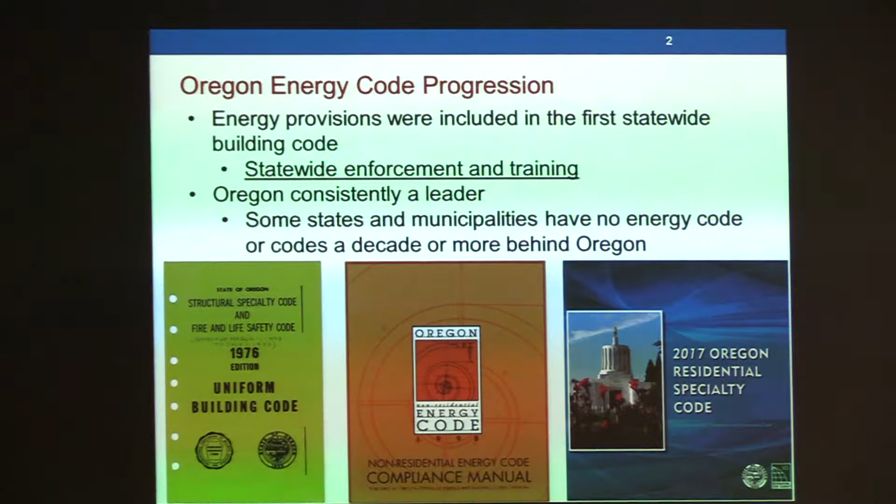One thing you can see here is I couldn't find a copy of the 1973 code, but I did find the '76. The '73 version, or at least a working cover that looked good, did have energy provisions. The very first code had statewide provisions for single-family residences. So from '76 to, for some of us old-timers remembering the energy compliance manuals we had through the 80s and 90s, all the way up through the current 2017 Oregon Residential Specialty Code, and soon probably a new structural code and energy code coming out.

One of the things about our code system is this board here, which is represented by 5 other boards that are here to provide input, background, and public comment. Just a reminder of how the system is working and how well it has worked, given the expertise not only from this group but from the public process we have here in Oregon.

One thing before we get into the real heart of it—there are a couple of background and disclaimer slides we wanted to get into here first, as we're moving into a code adoption process.

One thing was that we wanted to really look at the board's principles for code adoption, things that we try and keep in mind.

First is really keeping that long view—looking ahead, it's not just about a snapshot in time today. It's looking at how codes progress, where we can move things, because we've developed really good code in this state—not just the energy code, but the residential codes, plumbing codes, electrical codes, elevator board codes, et cetera. Some of the things we've developed here are really quite advanced. We at the division are taking calls from a lot of different places on any of the codes—we're getting calls on drainage plane work from Sweden, believe it or not. We've had calls on wood-fired pizza ovens from Georgia, New Hampshire, and most recently Florida. So some of the things we do here attract attention in other states, and part of it's how we've taken a long view on things.

So when we start throwing out numbers, we're not trying to be super precise here because again, there's lots of perspective on this. Same with things like the cost of energy. If you're looking backwards or forwards at energy costs, who would have thought that 10 years ago we were looking at importing natural gas, and today we're talking about building export terminals. So it makes some of the analysis a little more difficult. So when we talk about costs and energy in this, we're really maintaining fairly high-level looks at where we are in the code.

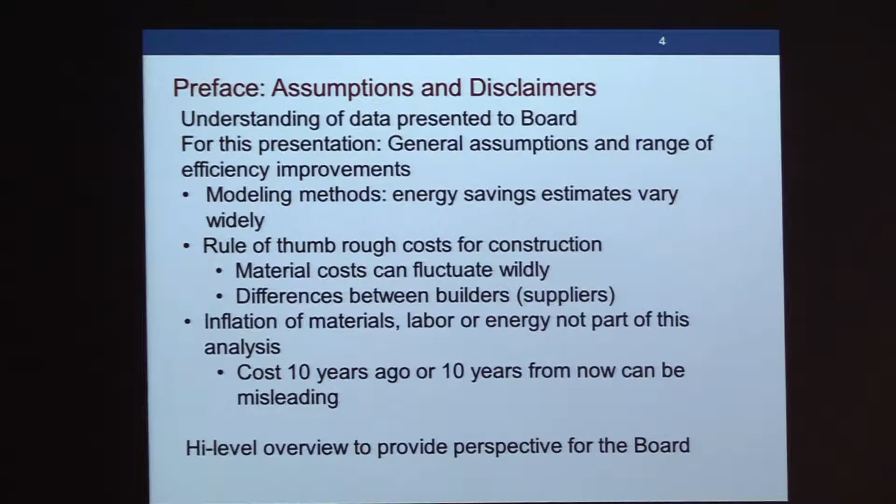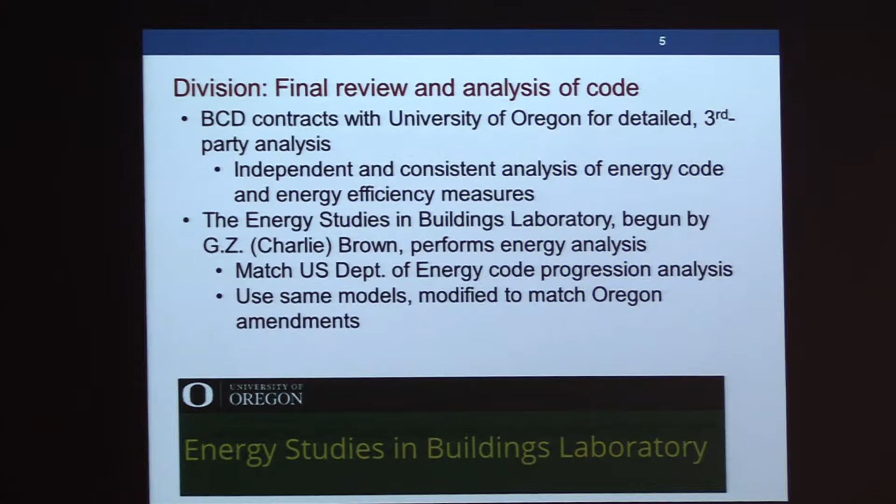When the division needs more precision looking at energy, we currently contract with the University of Oregon's Energy Studies in Buildings Laboratory. We want an independent third look, and we want them to give us an outlook on what's happening in the code.

When we look at buildings and building types, the U.S. Department of Energy has a set of specific building models they use, so the feds are tracking changes in model energy code at the national level. We use those same pieces so we're looking at the same shape building, same amount of window area, same amount of wall area, and the same number of people, so we can align with how other people are looking at code when we're looking at energy.

The main thing is we just don't want to be accused of cherry picking answers. We're going to try to maintain alignment with where the feds are going with it.

So where are we with code today? From the division perspective, and from the work of these people, I think we're doing pretty well when it comes to national codes. The 2014 code didn't get as much credit as we think it should have, but the 2017 is really a nationally leading code. It's a very good code.

We're going to have the University of Oregon do some energy modeling for us to compare that to where the national model code is. We feel our statewide system, compared to other states, gets a better return because we get that consistent return throughout the state.

On the commercial energy side, we've had the University of Oregon look at our 2014 commercial code, and they've determined that it's equivalent to ASHRAE 90.1 2013. We'll be one of six states for the feds at this level.

So you have that flexibility to build a better code. When we're talking about national rankings, some of the rankings you hear out there, we'll look at them from a perspective like a who's who list - I rank here, you rank there.

The general consensus of where model codes are - the U.S. Department of Energy publishes a map showing where codes are. It's not very clear here, but Oregon, as we try to get the feds to catch up with the map, will be in this second darkest green, equivalent with ASHRAE 90.1 2013.

But when you get to perspective, this is where you hear that Oregon was worse than Alabama. You may have heard that thrown around. It was actually put in front of this board once, I think.

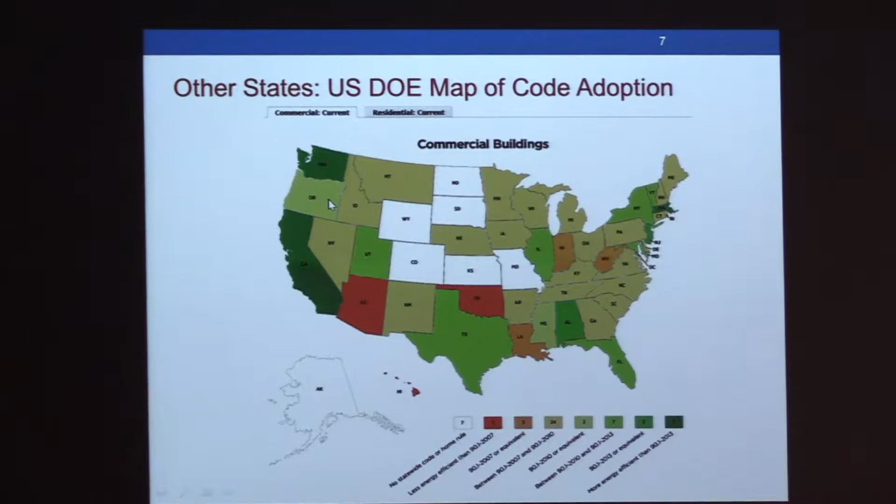When we look at different codes and different states, and how the Oregon system works: the state of Alabama did adopt a code where their legislature said ASHRAE 90.1 2013 would be the mandatory statewide code, but each jurisdiction in Alabama is free to adopt what they want. Alabama's largest city, Birmingham, in their city technical code...

When they get to adopting the 2015 IBC as their baseline building code, they delete Chapter 13 without substitution. When they talk about their residential code, they delete Chapter 11 energy efficiency. All references to those codes shall not apply. So if you go to their website and look at their plan intake sheet, there's no reference to energy codes. I've been to other cities in Alabama like Mobile, Montgomery, and Auburn. These cities have all modified their city building code.

A few others are still on just the 2003 IBC as their adopted codes. So again, the statewide system seems to work pretty well to get consistency for everybody in the state.

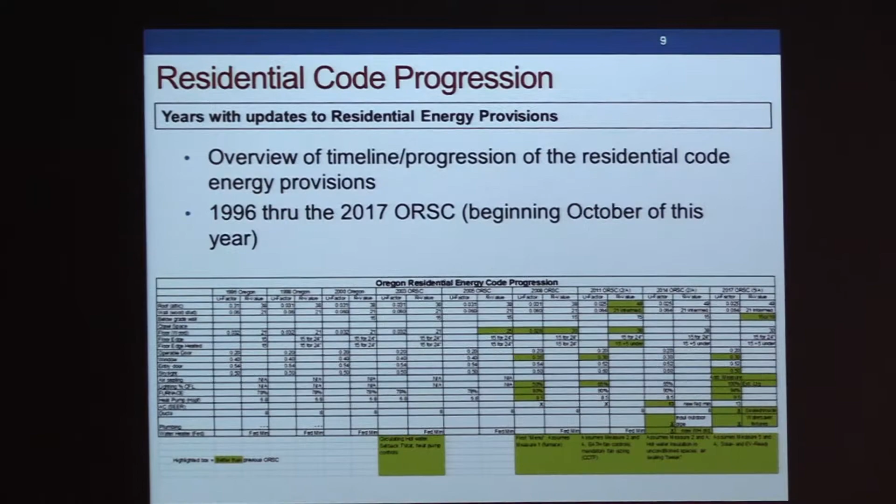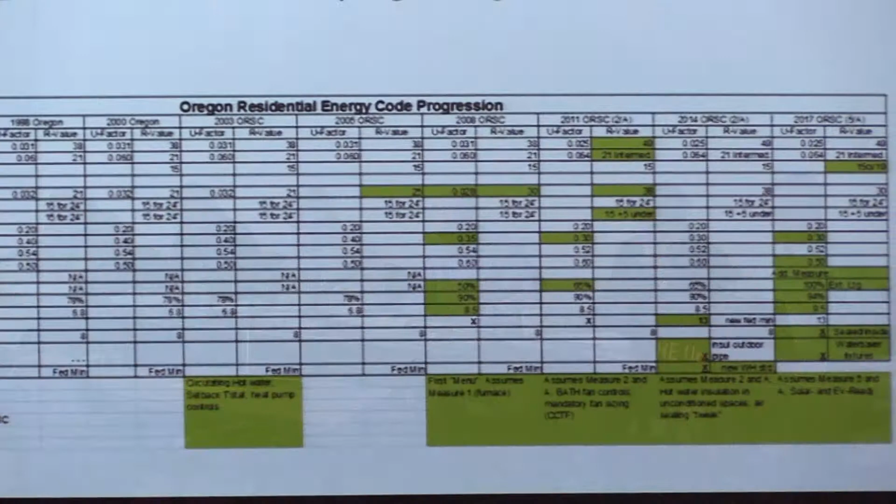So with that, we're going to do a little history lesson here on the residential code progression slide. I'm not asking people to look at the details. The main thing is the highlighting that you see on this sheet. Don't panic, don't worry about numbers. The highlighting shows between the 1996 code and the 2017 code when there was really a revision - some number changed, some figure changed, some new piece was added. If you look at this, you can see it looks like nothing really happened between certain years, and we'll go to the next slide for a little bit more detail.

From 1996 through 2005, not much really happened. We were adopting new codes, we were making changes in other pieces - mechanical, structural codes, the electrical codes were all having changes - but it looks like nothing happened between 1996 and 2005.

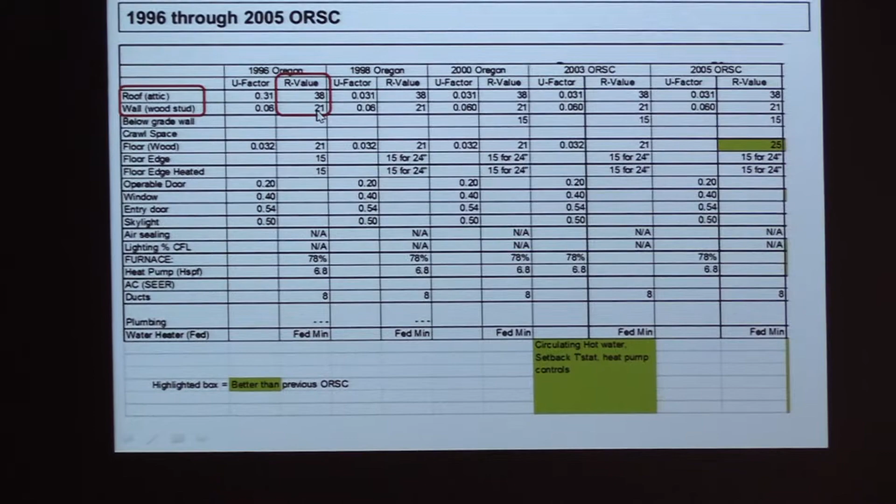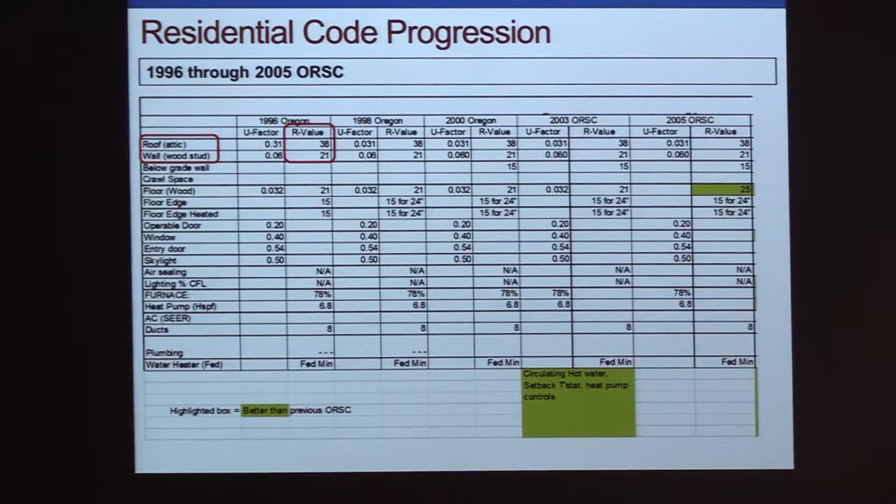Well, that's one perspective. However, if you note the little circled item on here, Oregon went to R38 insulation in the attic and R21 in the walls in the '96 code. And the model code did not catch up with Oregon until the 2006 IECC. So these are different perspectives you can have on this - it took them a while to catch up with us.

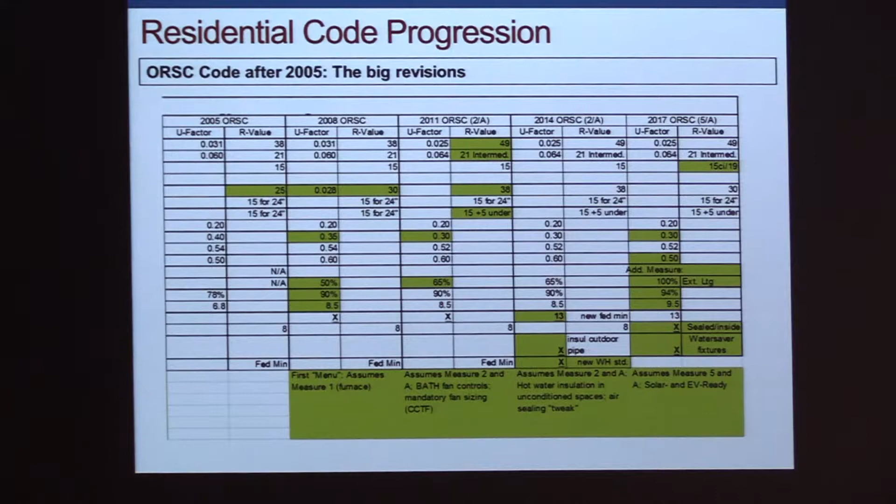However, in the past 10 years, since the 2008 code, where we brought in the first additional measures table - pick one from the table - in 2011 we updated and went to pick two. We're showing highlights of probably the most commonly used sections there. We added bathroom fan controls due to the Construction Claims Task Force. In 2014, some of the federal standards updated that affected us. Also, we added some water heater measures, and some small tweaks in the code were brought in about air sealing in homes. And of course, there's the 2017 code. So you can see that there's been a lot that's happened in the code over time.

Before we get into the 2017 code, because I'd really like to show you a bit more about that, I would like to show you a bit on the existing housing stock - the stuff that's been built during this time - and what effect this has had. We feel this gets overlooked a bit, the good work. Again, these are charts that put this together from some other internal research we were doing.

If you note the blue line on this sheet, on the right side, that says the number of annual housing starts - U.S. Census Bureau and other sources - we looked at the number of housing starts, how many buildings were constructed between 1980 and 2016, let's say the start of the 2017 upcoming code. We want to look at the effect of that.

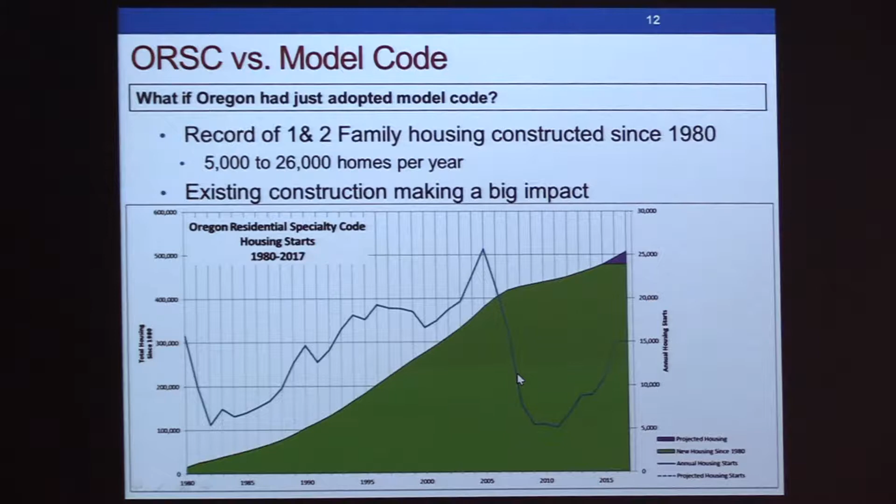You can see, in 1980, we started about 15,000 homes. We had that drop-off through the recession in the 80s, going from left to right as you're following the blue line, back up to the big peak before the big housing crash of the mid-2000s, and then climbing back up again once more. So we're looking at housing stock - the green is sort of the grand total. We have about 500,000 single-family and two-family homes that were constructed between 1980 and 2015. Again, this is a technical presentation.

Like with your 401k or your IRA, Oregon invested early, we invested often, and we're seeing the return of that. All homeowners, no matter where you are in the state, you're getting an energy benefit from the fact that these boards have adopted energy provisions for single-family homes for so long.

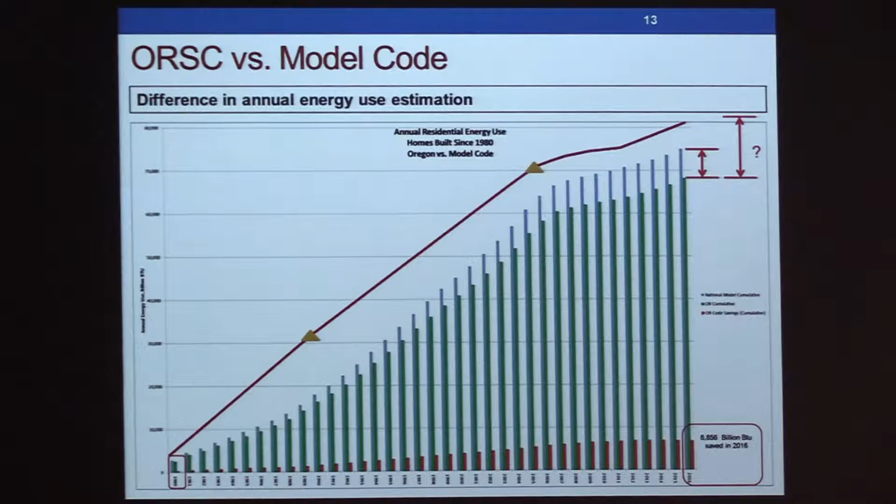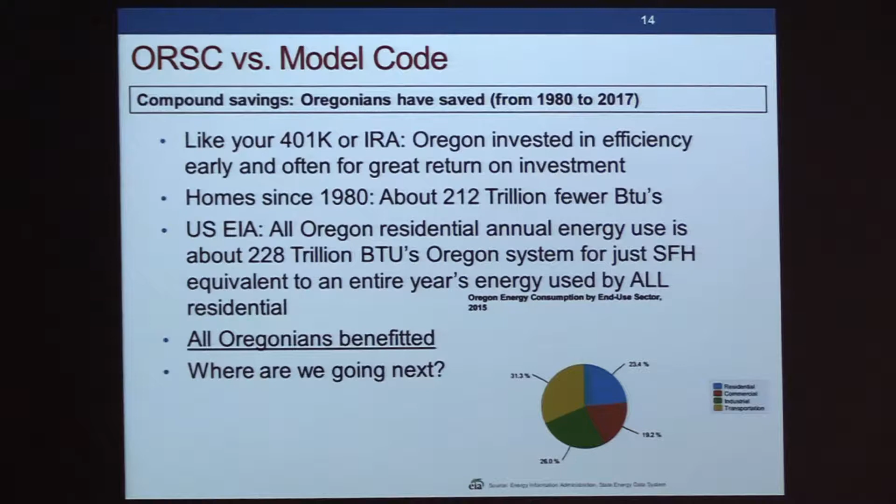You can get into different measures of all of these red bars at the bottom, which are the differentials. If you sum them up, it probably represents maybe up to 200 trillion or more BTUs of energy saved by that housing stock since we started constructing those homes. It's the equivalent of almost turning off a year's worth of energy from all residential construction, including all of the condos, apartment buildings, townhomes, and single-family homes. It's saved enough to sort of make up for an entire year's worth of residential energy use.

So now we're going to look forward to the 2017 provisions, and we've heard some comparisons to our neighbors, so we thought we'd give you a little look at how we compare to them for the 2017 code, to show you how successful that really is.

When it comes to comparing to our neighbors to the north in Washington, we have almost identical prescriptive requirements for the thermal envelope of the home. We have pretty much the same requirements as far as windows, roofs, ceilings, wall insulation, et cetera. Both states have sort of an additional measures system. Washington has a point system, and they also include the size of the home for the number of points. But when you start out with the basic home, we're fairly comparable. Better on just a few pieces in Oregon, and Washington has a few other little pieces where they're better. We have mandatory requirements that were added, for shower flow and a few other pieces.

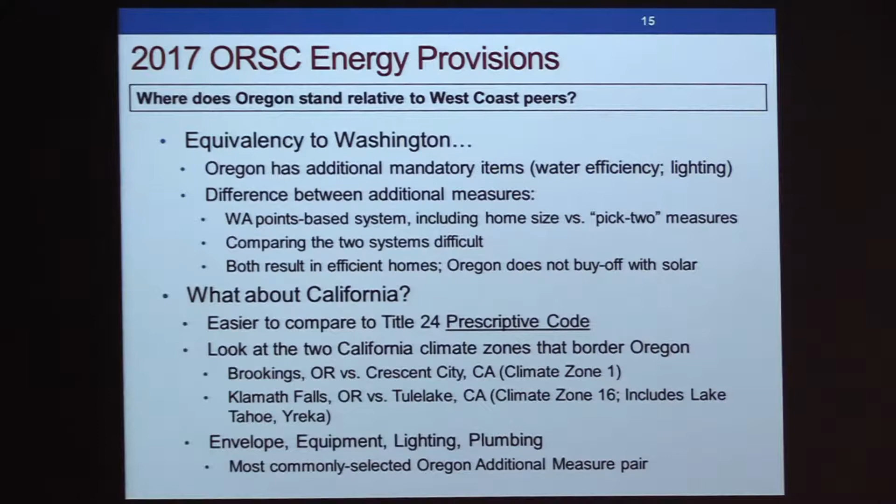But when it comes to California, they have a prescriptive menu path, or recipe path—follow this recipe, here's how you can build a home in California. It's easy to compare between the two states because along the border, California has a code for a home in Crescent City, California, and we can look at a home built in Brookings, Oregon. We can do the same for a home built in Klamath Falls, comparing that with California's Climate Zone 16—Tulelake and Yreka, or even up at 6,000 feet at Lake Tahoe. So we're going to look at the envelope, some of the equipment, just the bare prescriptive requirements for the state of California.

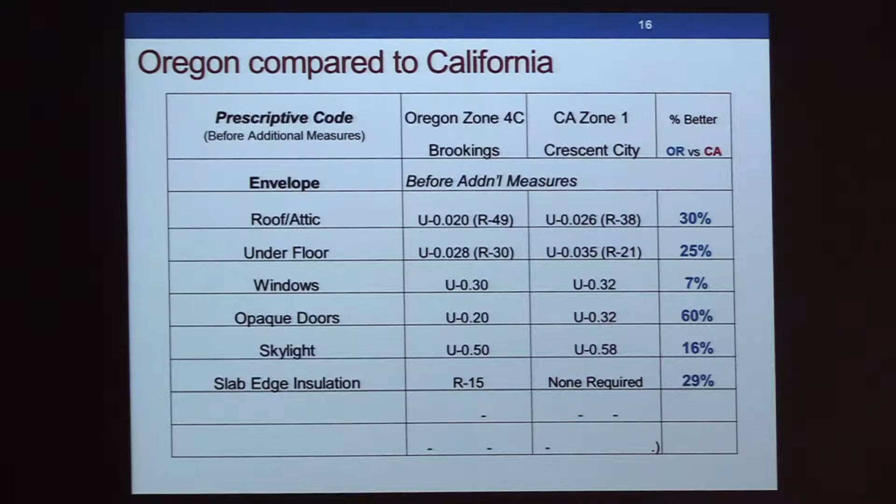Before Oregon gets to its additional measures, we wanted to compare the baseline envelope for a home in Oregon with California—Brookings versus Crescent City. If it shows up in blue, this is the percent better thermal performance for Oregon; red will be California. In the roof or attic, we're at R49, California is R38. Underfloor insulation, R30 versus their R21. Windows and doors, same differences are happening there—Oregon's better, has a more restrictive requirement, so on the U factor, lower U factor is better. We require better skylights for our basic unit, and we require slab edge insulation for residences in Oregon. California has none.

Basement, again, better. California makes up for it in that they have a more restrictive wall requirement. They pretty much are telling people your baseline wall can't be the standard 6-inch studs. You need to put on continuous insulation to meet their requirement.

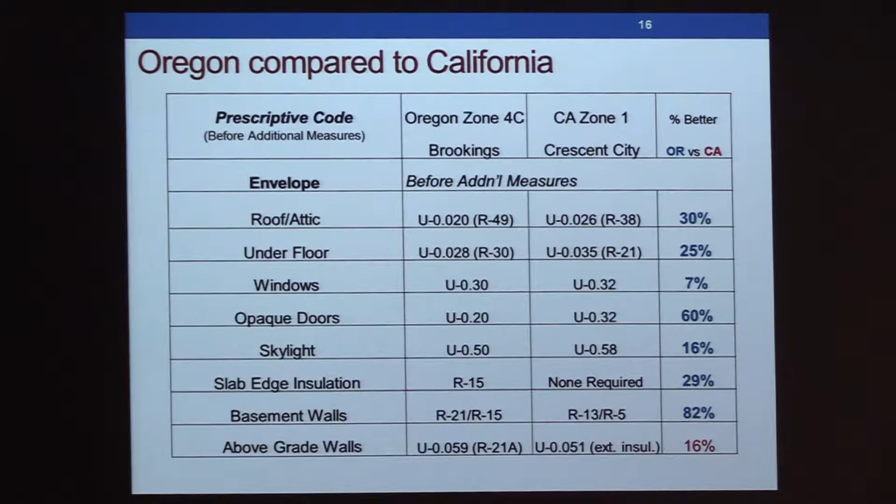If you were to move from baseline thermal performance comparison to Climate Zone 16, which would include Yreka, Lake Tahoe, Tulelake, they require a radiant barrier in the attic. So they look at doing additional savings for homes in those climate zones. They want to cut down on cooling load. But that's the difference on the envelope.

So once you start adding the additional measures that are in Oregon's code, versus what's basic in California, both states, if you were to use envelope measure number 5, which is probably going to be one of the more commonly selected measures, both states are requiring ducts inside. Oregon does have a less restrictive standard. We do have an allowance for some ductwork outside of the envelope.

When it comes to duct sealing, California requires you to do testing. But when it comes to home air sealing, they don't have specific requirements on the home air sealing. Envelope measure 5 is the one where we're adding the additional top plate sealing, which gets about a half to a full air change reduction when you do a blower door test on a home.

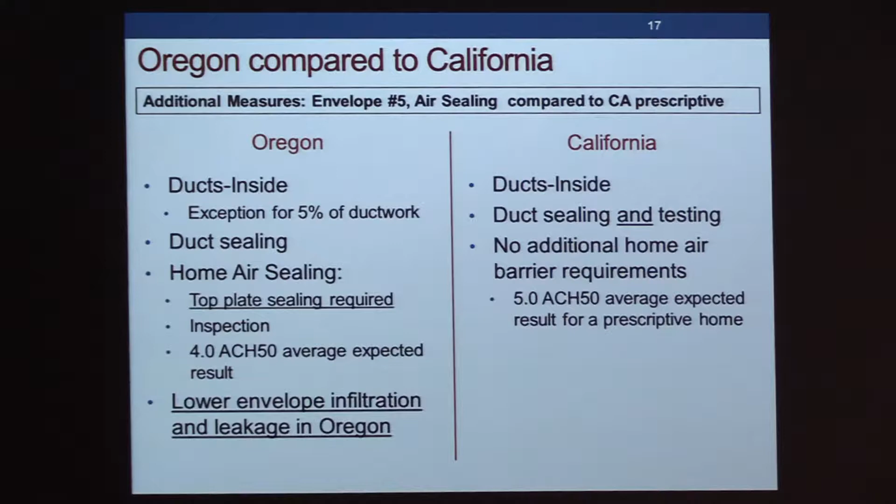While California has a bit of an advantage on the ductwork side, when it comes to the air leakage side on Oregon homes, they're probably going to be in the lead on that. We continue to have people looking at homes and doing aftermarket studies to see where we're getting on that.

When it comes to additional measures for equipment, most commonly picked measure for some time has been the high efficiency furnace, especially if you have a gas home. 94% versus 80% in California. If you're an electric home and you're selecting the heat pump measure, it's a 9.5 heat pump factor.

Higher is more efficient. Both states, really, when it comes to water heaters, were restricted by federal mandatory prescriptive minimums or preemption by the feds. California does require you to pre-pipe for an instantaneous water heater. They don't require it, but they require you to pre-pipe for it. They also require what's called compact water line design.

That gets us into, we can't really run or make major changes from this board to the plumbing code without a little bit of cooperation with them. And they do require that hot water lines 3/4 inch and larger need to be insulated.

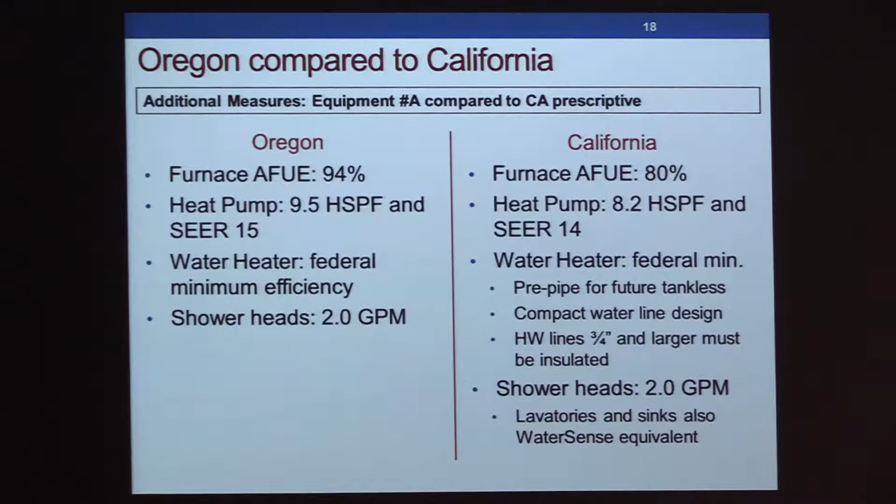Both codes now have low flow shower heads at 2 GPM in their state codes, and California does also have the equivalent of WaterSense flow required for their lavatories and sinks.

California has some additional requirements currently for residents to have occupancy sensors in their laundry rooms, bathrooms, and equipment rooms, sort of those unoccupied spaces. They have you put in an occupancy sensor there. They do require that exterior lighting have both a photocell and a motion sensor or something equivalent. So their exterior lighting has a little additional as well.

California will mention their appliance standards. These are pieces that really we can't get into currently in the building code, so it's something that people are bringing in after the fact. They might be bringing their refrigerator, their washer and dryer, pieces that we don't currently regulate. Department of Energy does have some appliance standards. There are also federal appliance standards that work, and if California has an appliance standard, most likely it's what we're going to see on the shelf here in Oregon.

So but with that general comparison, I think we could probably say we're pretty close. Do we really want to do a comparison between us and local states? But when you hear we're behind, or we're ahead, this is some perspective to see where you want to go, when you're looking at comparison to other places.

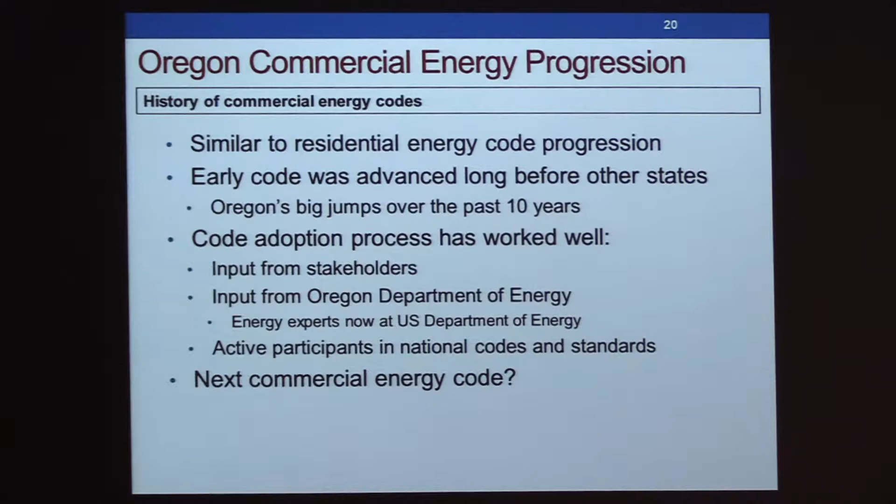One of the things that we've had is we've seen what's coming up at the national level before it made it into code books, and sometimes we're able to get that in earlier than other people. I've had the good fortune to be able to be out and work on the IECC, was able to do that for about 6 years, and know that in the upcoming model code on the mechanical side, it's going to be a lot easier to read and enforce, hopefully.

So as we're moving to the next commercial cycle, excuse me, the little highlighted change chart gets a little more difficult, just simply due to commercial codes being a little more, there's a lot more involved.

More air conditioning systems. In code, we regulate 2 different roof types, 4 wall types, 4 window types, 3 floor insulation types, and multiple types of air conditioning systems. There's 18 pages of mechanical code alone just on the HVAC system on the commercial side. That's almost double what we have for the entire residential code in Chapter 11.

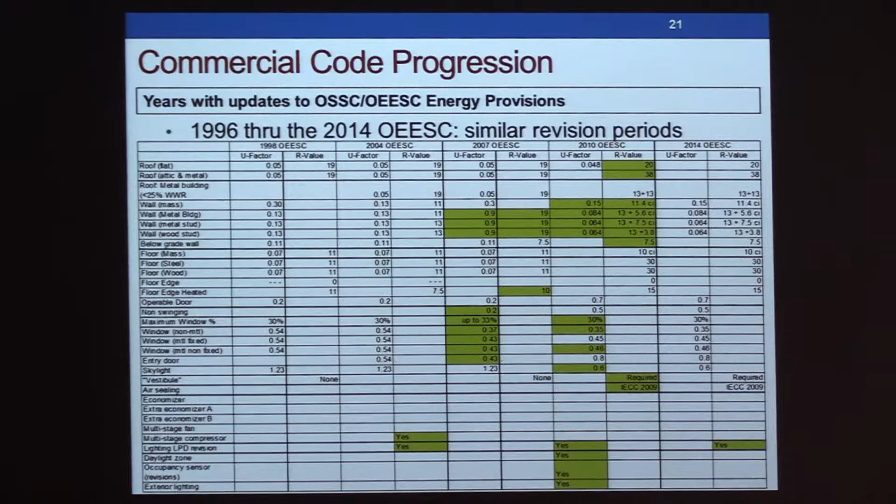So it's a big piece, and when you're looking forward and backward in code, sometimes you may have one wall type that changes 20%. Another wall type may not change at all, and then a third wall type may change 40%, as far as the requirements. And so tracking how codes change is a little tougher on the commercial side.

But given that, as we're looking forward to the next codes, costs are something that you take into consideration. The boards always make the recommendations looking at health, safety, welfare, but also as necessary for the conservation of precious resources.

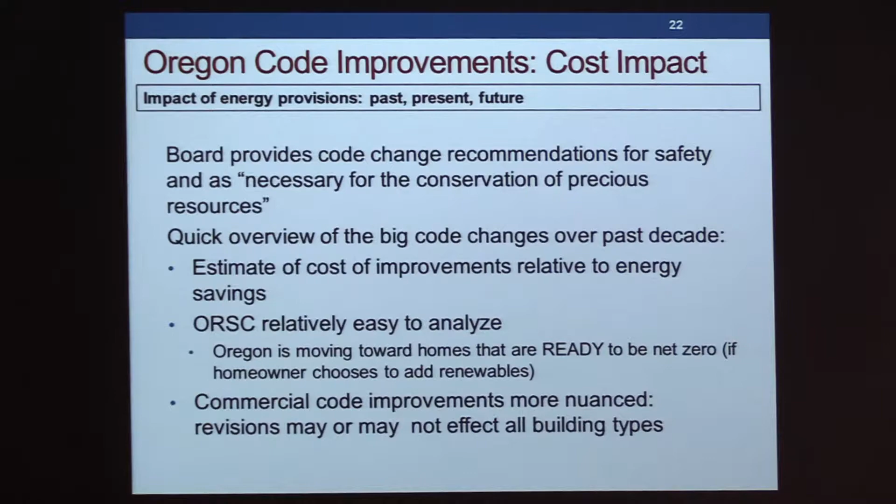So as we would like to sort of take a look back at what's happened with costs in the past, the residential code's very easy, or much easier to look at, just simply due to fewer things you're looking at changing, a simpler building, easy to look at. The commercial code, as you saw earlier, is a bit more nuanced on how changes happen.

And again, there are lots of different perspectives when it comes to costs. But we've been working on just some general numbers here, looking at the residential code since the 2003 code.

There are cost estimates that come out from lots and lots of different groups. After every code update at the national level, the home builders bring out their estimates of cost. The U.S. Department of Energy, Pacific Northwest National Laboratory, they do a set of costs when they look at the code changes. We've seen costs come in from, when Earth Advantage came in, they have one perspective on costs. This board, they'll make a declaration of the estimated costs as well.

And the ranges are pretty big. For a 2,400 square foot home, looking since '03, someone could say it was only $1,800. The next person could say up to $14,000 or more. Based on generally looking at what's happened, it's probably on average somewhere around $4,000 for that typical home.

And it probably saves somewhere around $320 a year, which on a straight line payback is about 12 and a half years. And when we're talking about financials and paybacks, we're not currently trying to throw in the exact number for what's happened with energy costs, financing assumptions, and what happened to material costs during this period.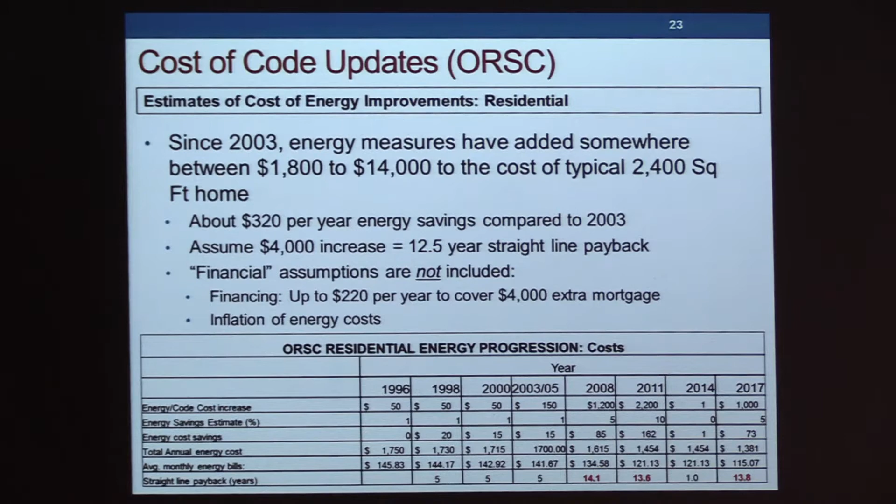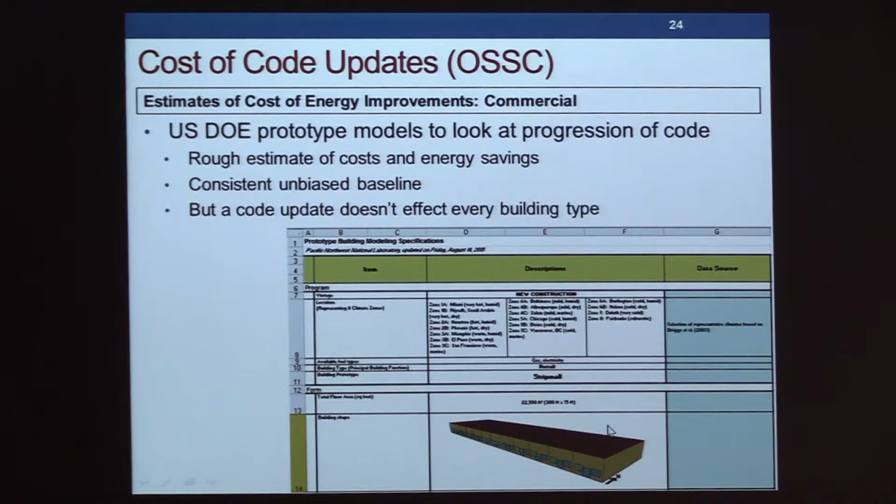On commercial, again, we'd mentioned these prototype buildings from the U.S. Department of Energy. They give us, you see the little building here, an Excel file that tells when it's occupied, how it's occupied, what all the construction materials are. So what we've been able to do is use these to say, how many square feet of roof, ceiling, et cetera, and new glazing were affected through each code cycle, and did a same sort of general analysis, again 30,000 foot view, but for a 22,500 square foot strip mall, like the little building you'll see across the street, or really what you're in right now.

You see about a $112,000 cost increase and about an 8.4 year straight line return on investment based on the energy savings, and throwing in some guesstimates on what it cost, how much of the building was gas versus electricity.

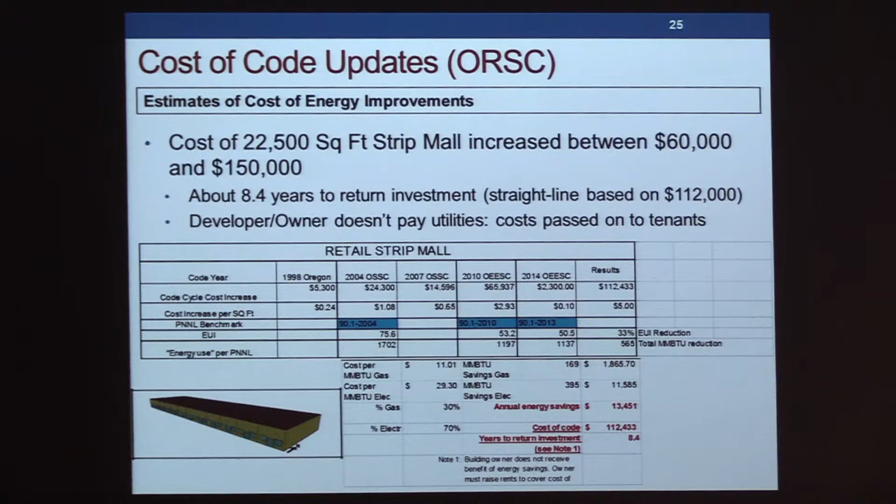But one thing to remember is, yes, the building owner isn't getting that payback. The tenants are getting the benefit of that, so it's built into the rent on those. It's something we're putting out there for what you have to keep in mind on these.

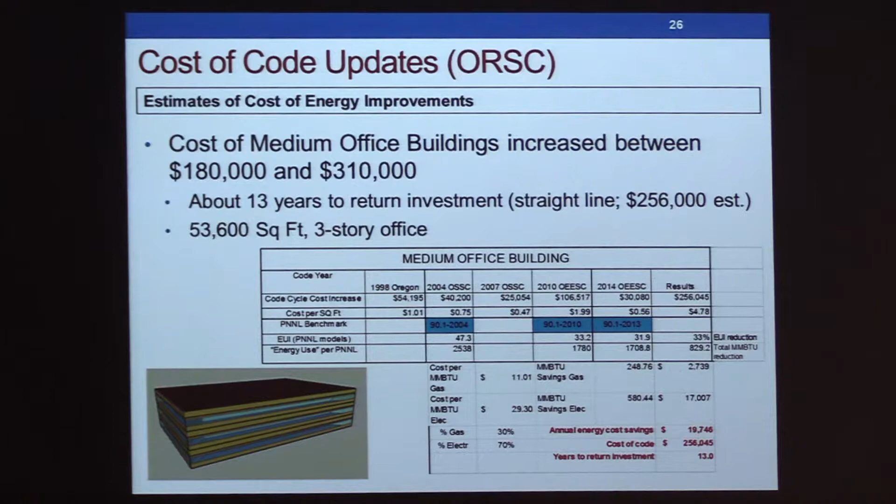And also, we took a 53,000 square foot office building. These buildings have seen a lot more change in code due to the complexity of the mechanical systems, and 18 pages of just mechanical code alone. Probably somewhere in the neighborhood of $250,000 and about a 13-year payback for those buildings.

We ran the DOE model secondary school. It's 211,000 square feet, about $900,000, somewhere in the middle on all of this, and about 9.5 years for that to pay back, and this is a public entity. They'll be more than happy to have this because they are really long-term owners on those buildings.

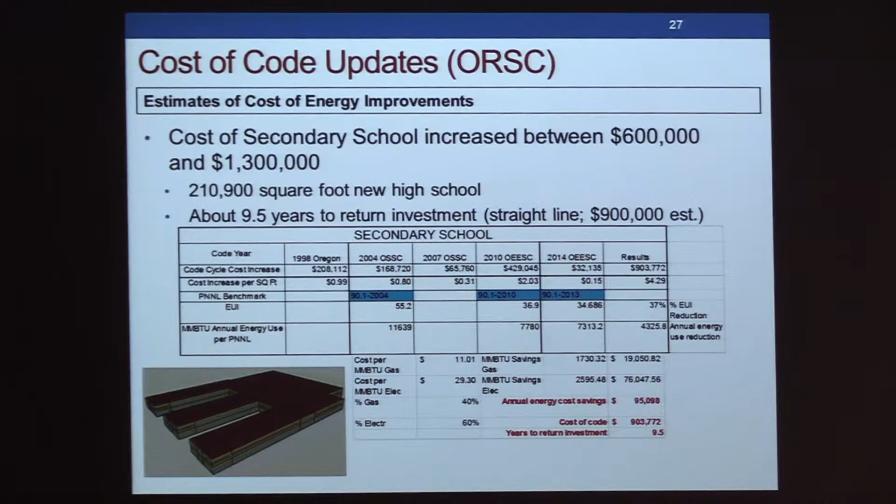But overall, over the years, of these more recent code changes, looking at these few buildings, a parking lot or a parking deck has seen very little cost change, but $3 to $6 a square foot, a 7 to 15 year payback. This is the long view that these codes have had in the recent history.

And so in summary on where the energy code has been and looking forward to the next code cycles, there are a lot of things that are still outside of your control. When it comes to what's going to be happening to natural gas costs and electricity prices, utilities, what's happening, we have a renewable portfolio, clean grid affecting the electrical energy side and costs there. We're seeing new technologies, distributed generation, the effects of photovoltaics and renewables on the power system, just things that are outside of your control that are going to be affecting potentially decisions you make when you're looking at energy code in the future.

And keeping some of that long look, you also are going to continue to look at, this is a statewide code. How does it affect people in the valley, in rural Oregon, on the coast, different communities? We're having a bit of an affordable housing crisis that's pretty much hitting the news, and everyone's looking at that. How does that affect affordable housing?

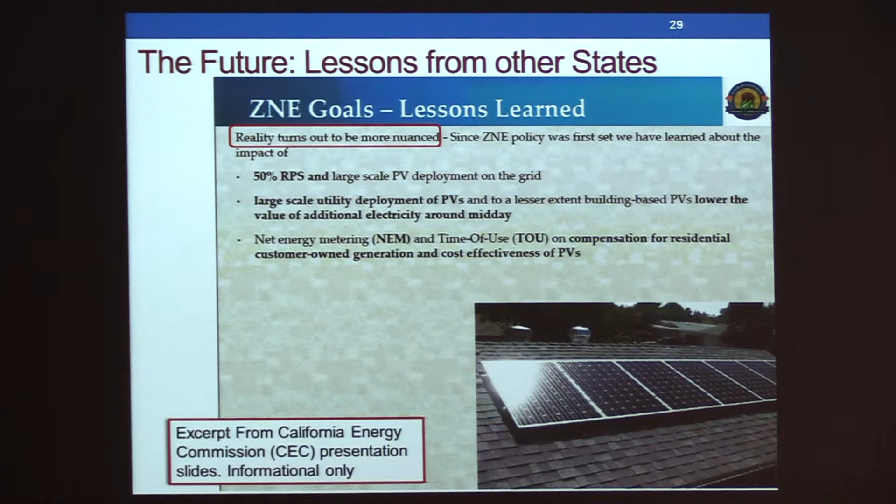So here's my technical geek code slide. Those of you in the energy world have heard of something called a duck curve. This was part of their rollout to show why looking at solar and putting photovoltaics on homes can be a little tricky.

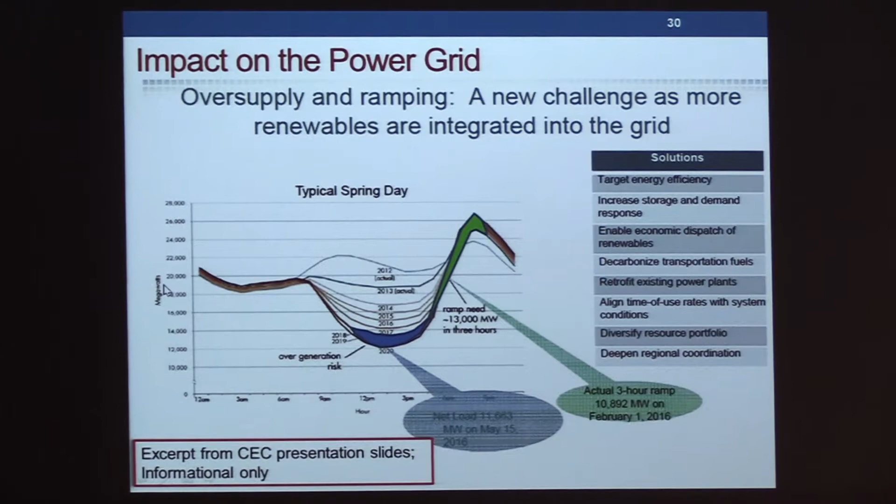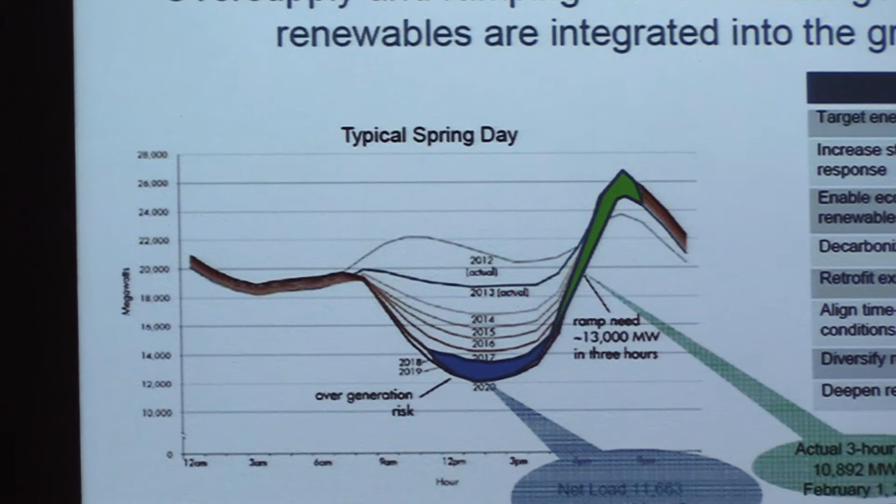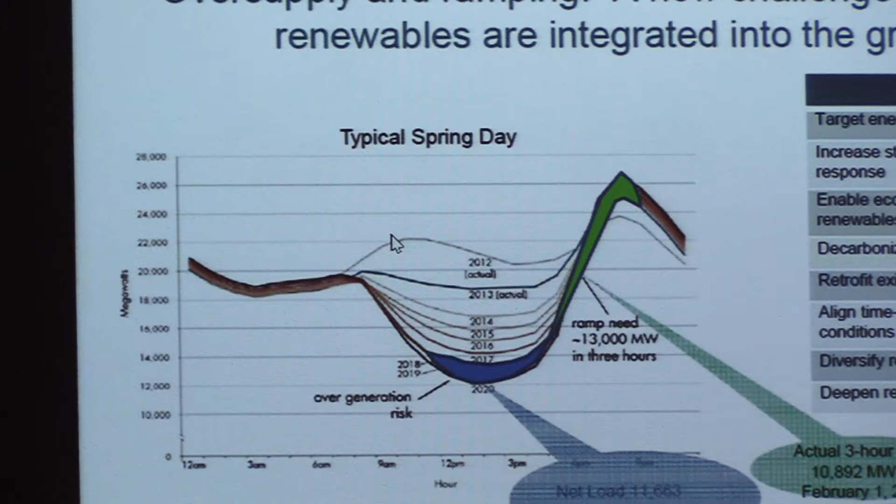This is looking at the energy used or produced by the California power grid, all the ISOs down there. On the left side you're seeing megawatts of generation. So we have 20,000 megawatts at midnight on a spring day in California. All of the power plants in California are trying to put about 20,000 megawatts of power onto the grid to make up for what's being used in the home, so they're trying to balance that out. Then on a spring day, looking at the 2012 line, as you get towards 6 a.m., 9 a.m., the power demand starts to go up as people are turning on power at work, more energy is being used. Electric water heaters are making up for the showers that were taken earlier in the morning.

The demand went up, and then on a spring day, toward the end of the day, you're starting to see the peak, the effect of the sun on the buildings all day. The air conditioning loads are starting to go up a little bit, though spring normally isn't starting the day with a lot of air conditioning on homes and businesses. So around 5 or 6 o'clock, you start seeing the demand climb because people are going home. They're starting dinner, turning on electric ranges, turning on their TV, turning on the lights at home. But the lights at work still aren't off. So this is where that peak is happening on a spring day for their power grid.

Well, the next lines, if you look at this as you go down through 2013, 2014, you're starting to see a dip appear. What's happening is more photovoltaics were really coming online in the state of California. There was a big push to get more solar power onto the system. Well, as the sun comes out, all of this solar is getting pushed onto the grid.

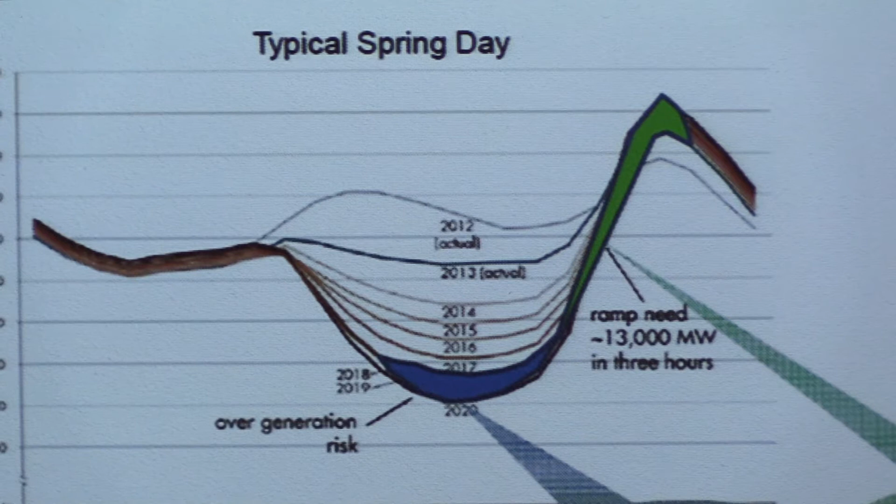The power companies have less demand, so they have to shut off generation capacity. Slowly over time, in 2016, they saw what used to be in 2013 around 20,000 megawatts of power they needed to have generation on. They hit as low as 11,000. And it has the potential to go even lower as more solar comes onto their grid.

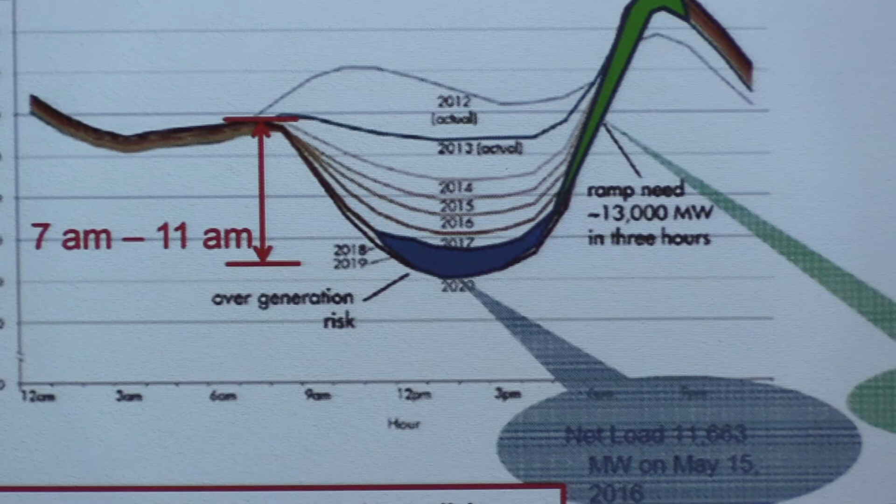But once the sun starts going down, what happens? It's not generating power anymore, so they have to turn power plants back on. This is creating a conundrum for their power grid. We're seeing this drop from 7 to 11 a.m., and then having to ramp back up in the evening.

And it does have a bit of an effect on the state of Oregon, because in spring, what is Bonneville Power seeing? Lots of flow through the dams. You've heard of the call to shut off wind power generation. It is affecting us, it's flowing uphill to the state of Oregon in some way.

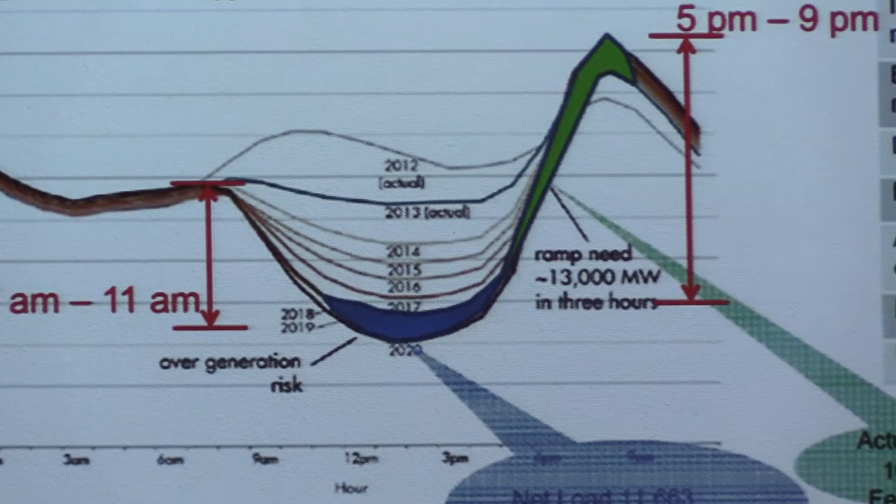So again, real time in February of 2016, over 3 hours, the California utilities had to turn back on almost 11,000 megawatts of power capacity. They had to find a place to either do short-term generation or buy from Oregon, get somewhere into their grid to make up for the fact that they had this sudden increase in demand.

So these are from the California Energy Commission slides they're rolling out to explain why they're making the decisions they're making when it comes to getting to a zero net energy residence for their code.

One other issue is, whether it's residential or commercial, plug loads aren't going away. No matter what, in the home there's cooking, lighting, the TVs, the chargers, all the other electronics.

What they're discovering is that within the practical range of what they can do for efficiency measures, even if they eliminate all heating, cooling, hot water, and ventilation loads, what's left over of that energy use in a home may not be able to be made up for by the photovoltaics. You could make everything else disappear, and PV is still going to be a tough question for code adoption. So they had to look at that in the long run.

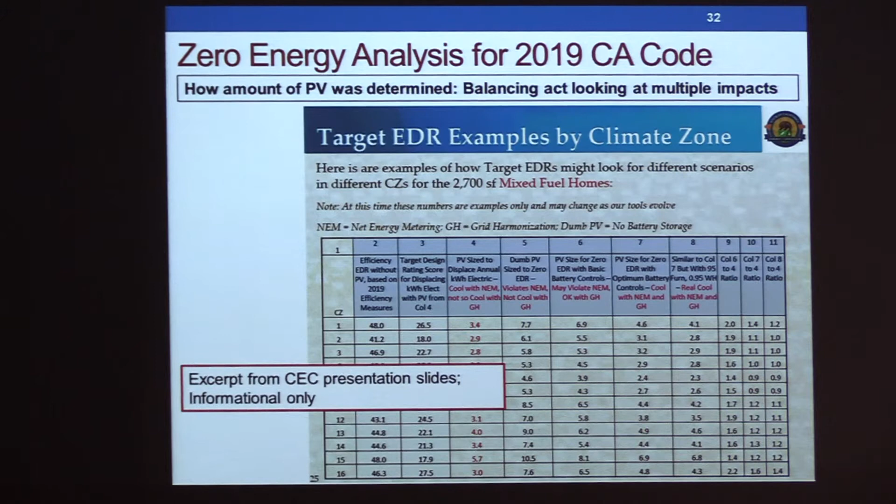They came up with a final code, what they're rolling out for 2019: updates in most climate zones to the attics and the walls. They're now going to require a home rater for every single home. That home rater is going to take your plans, look at it, and assign a value for energy usage. Then the home rater, through a special state program, will back out the energy used for water heating and electric space heating.

So it takes out that piece of the pie, which you saw disappear up there, and that's what the photovoltaics needs to be sized for. They'll base it on that so that gas homes have the same amount of PV as an electric home, an all-electric home.

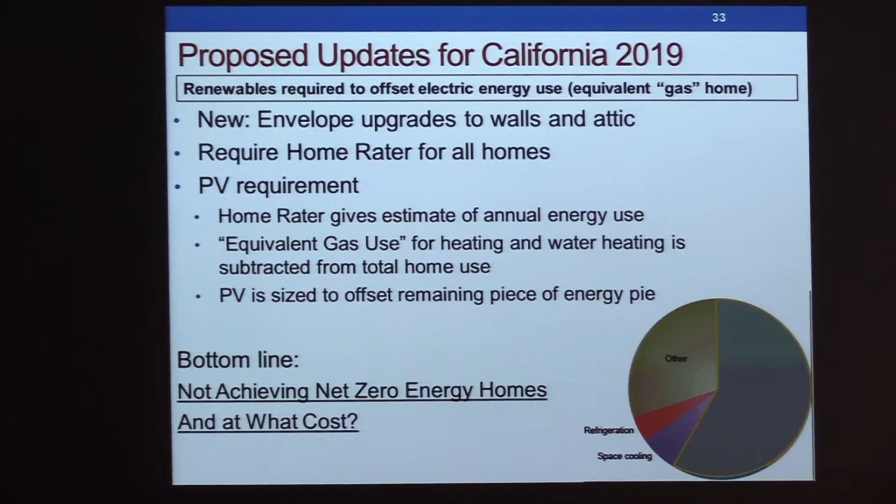So not to break your rhythm here, real quick, Mark -- is it saying that it'll be net zero electric, but the gas side kind of gets a pass? The gas side gets a pass, and so does an all-electric home. Anything for space heating and space water heat, or domestic water heating, gets subtracted out for that home as well. So it'll offset everything but what's used for heating and water heating.

Okay, so they aren't quite to zero. They're getting really close, but they're finding it difficult to get to that. Okay, so now for what they're showing people for the cost of this.

We have the equivalent of climate zones 1 and 16. They're requiring higher performance walls, so additional exterior insulation. They're saying $900 for a 2,700 square foot home. Attics in most climate zones will have to get some additional insulation in them.

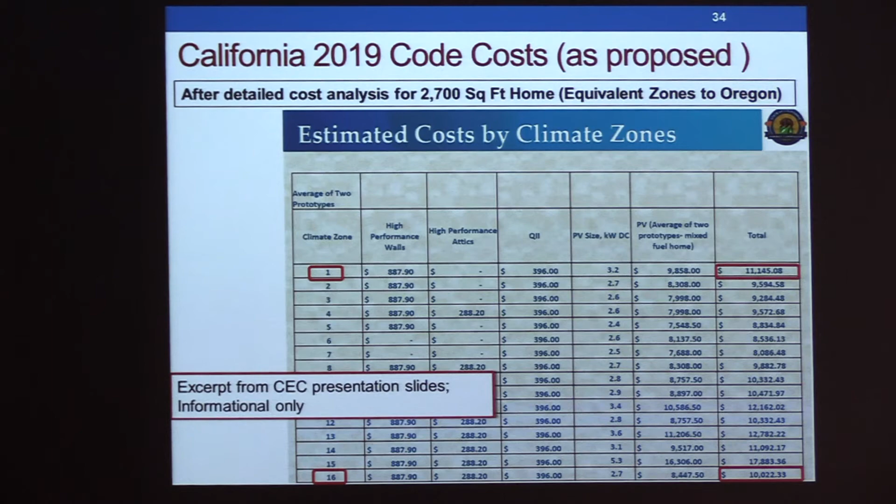Then the QII, that's the home rater. I think it's Quality Insulation Installation is what QII stands for. So you're going to pay for a home rater who will then tell you how big your solar PV system needs to be. In climate zone 1, a 2,700 square foot home may need somewhere around a 3.2 kilowatt PV system. The bottom line cost for equivalent Oregon climate zones, for a 2,700 square foot home, is between $10,000 and $11,000 for their code increase.

So they're letting people know what's coming down cost-wise. Washington does things a little differently. Some of these slides, these same spreadsheets, were part of the Earth Advantage presentation.

When Washington's committee went through their code cycle, they used a state-created spreadsheet. This was developed so that all state buildings had to look not only at a 50-year life cycle cost of the building, so after 50 years, did the state spend less money than they would have if they hadn't done an energy improvement. They also have an extra line for the societal life cycle cost of carbon. So they add all these pieces in. These are the slides from one of their all-gas homes.

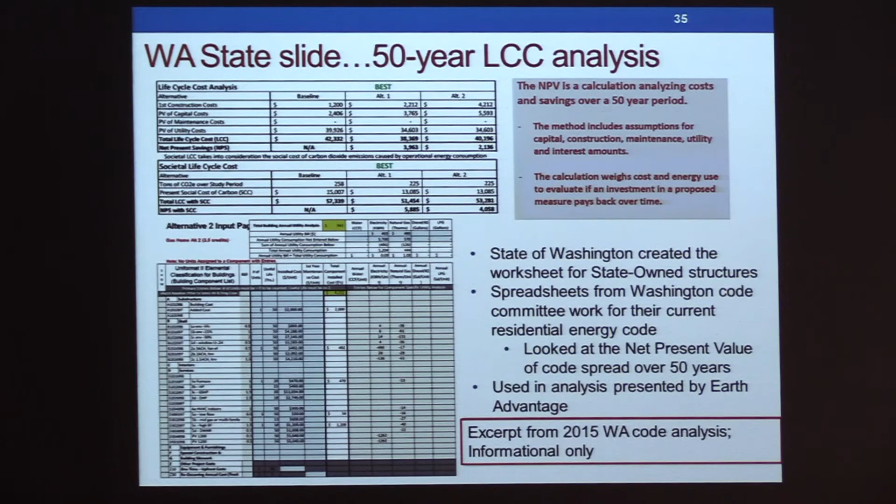For the 2015 code, they had about a $4,000 cost increase for one of their combinations of points, for 3.5 points. It saves, under the life cycle, about $4,000 over a 50-year lifespan. So do you look that long term? How are you going to measure this? Of course they had the cost, inflation of energy, a bunch of other pieces thrown into this, but it's a lot of workings in a specialized program, something that was developed for state buildings.

We have California now that's going to have really a third party tell you what your basic code compliance path is, and how much you have to spend on your home, and then the building official comes in and looks at it. So it's complicated, it's difficult, but the division wanted, for this little additional piece, to consider some of the questions that are out there.

What for an energy code should be mandatory? What should be incentivized? How do you make that work? When does the cost become too much? What sort of life cycle do you compare to? When you're looking at the long run, is it 1 year versus 2 years, 10 years, 5 years? How do you spread this out?